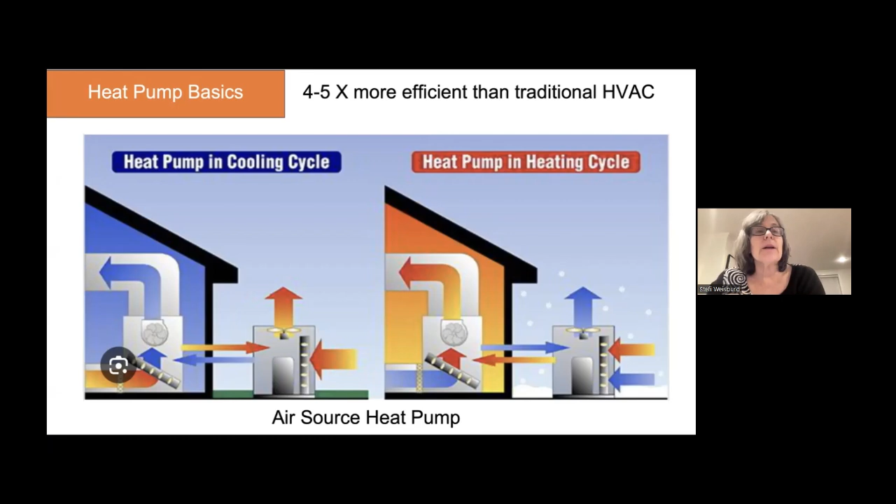The pictures here show what's called an air source heat pump because they're getting the heat from the air, but you can also have a ground source heat pump or even a water source heat pump for where you're collecting the heat to move. If you already have ducts in your house, you probably would get a central unit that will just replace either your AC or your furnace and work through there.

But if you don't have ducts, or if you have a room that needs supplemental heating or cooling, or you're putting on an addition and you don't want to pay to have a gas line in there, mini splits are the way to go. And actually, you can combine them. They're very versatile depending on what your home configuration is. There are also window heat pumps that just plug in to a regular outlet, and those are great for both homeowners and renters. If you haven't experienced living with a heat pump, it's a different sort of philosophy and experience.

So when you have a gas furnace, and typically installers will oversize their gas furnace because they don't want to have to come back to your house if you're complaining about not enough heat. And that furnace will just blast on and off, and you'll know when it's working.

A heat pump is very different. It's a lot more subtle. It's more like a feather. It will make tiny little adjustments to the temperature, and you may not hear it at all.

As I said before, if you can lower your total energy bill, especially if you're on propane or electricity. If you go from gas to heat pumps, your electricity bill went up. That's what happened to us, but our overall energy bill went down.

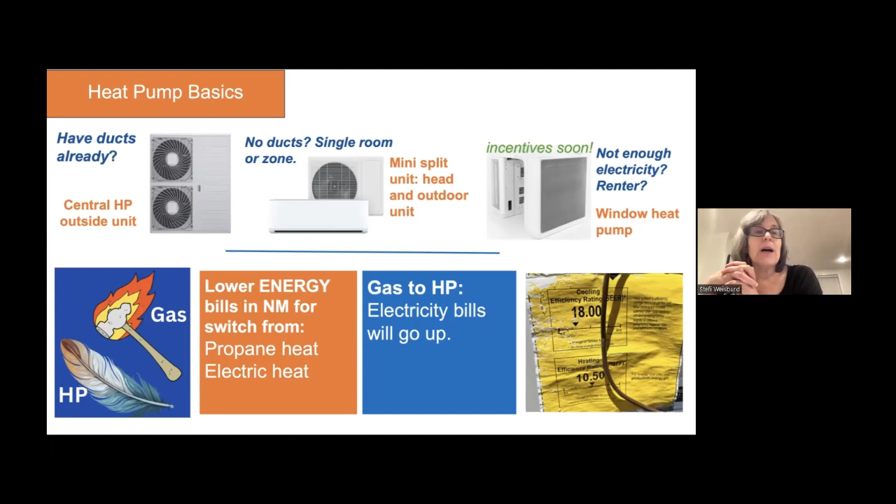When you get a proposal from an installer, you might see these words on it: single stage, two stage, and variable capacity. They essentially reflect the efficiency of the heat pump. The single stage and two stage are the older technology, and they're kind of what gave heat pumps a bad rap to a lot of installers who think heat pumps don't work in cold climates. These were really used a lot in the Southeast.

However, Carl and I were seeing a lot of these installed this summer, coupled with 80% furnaces, which is not very efficient, but he'll discuss that more when he talks about dual fuel. That's when you have a heat pump and some other heat with it, like gas or even electric, but dual fuel we're going to talk about is all gas.

So the last one, the variable capacity, or having inverter technology, this is the newest tech, and there's a whole class of heat pumps called cold climate heat pumps, and Carl is going to tell you about those.

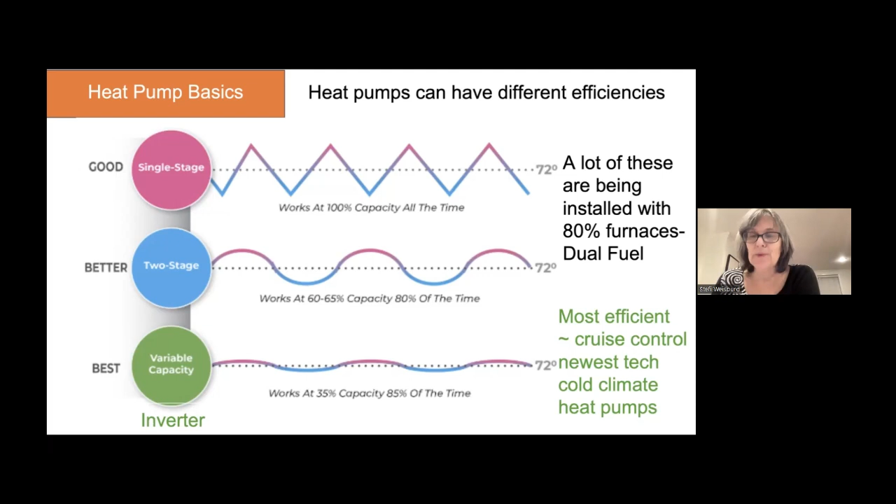Thank you, Steffi. So before I go on about the heat pumps, I just wanted to emphasize a couple other things and highlight some stuff about what you already explained. With heat pumps, you technically are going to feel a range of heat that's more consistent and even, instead of feeling that blast of heat from a gas furnace when it comes on. As Steffi mentioned, you feel it. You can put your hand by the register. They're either on the ceiling or the floorboards, and you can feel it. You can be like, man, that's nice and warm.

With the heat pump, if you decide to go that way, I encourage you not to be disappointed that heat pumps will tend to run a little more frequently, but they're actually using less energy. And what they're doing is maintaining temperature over the duration. Instead of going hot, cold, they kind of run at a consistent temperature. And a lot of homeowners that have received heat pumps think, oh my God, this thing runs 24/7. It's constantly running, but it's running at a very low energy consumption and keeping a steady state of heat.

And it's going to be more lukewarm to the touch. So you won't feel that heat as you put your hand near the vent, but it'll be warm. And trust your thermostat. If your thermostat says 72, 73, whatever you like it at, trust it's going to maintain that temperature. So just wanted to point that out before we go too much further.

But anyway, as Steffi mentioned, cold climate heat pumps are the newest technology, and they're not even that new. They've been in existence for several years already. And you might have heard about heat pumps in general from other people outside of New Mexico. We typically have not had heat pump usage here in New Mexico, in our part of the country, at all in history, because they just have never worked well in this climate. But back east, they've been using heat pumps for a lot of years.

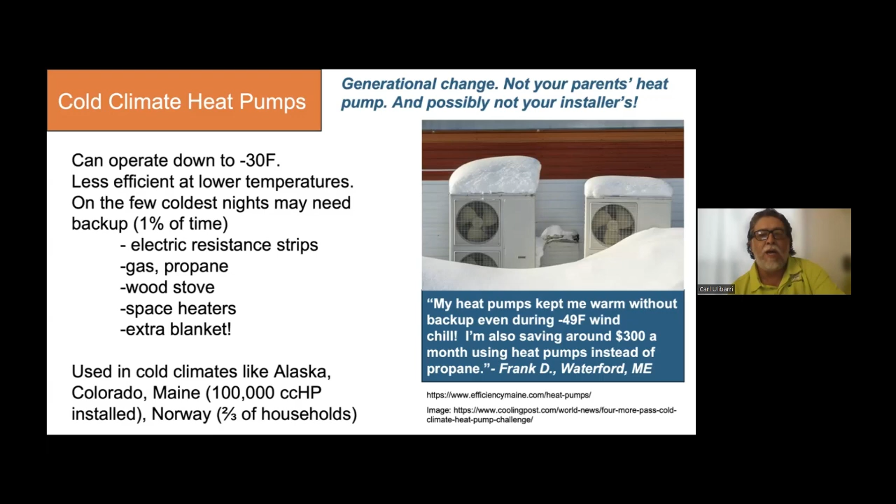Space heaters, wood stove, you can even throw on an extra blanket if it gets that cold for 1 or 2 nights out of the entire year that you would have that scenario. But we have friends in Colorado that are using cold climate heat pumps with no backup heat at all, and they're perfectly comfortable in that climate. So they work, and they're proven technologies. So next slide.

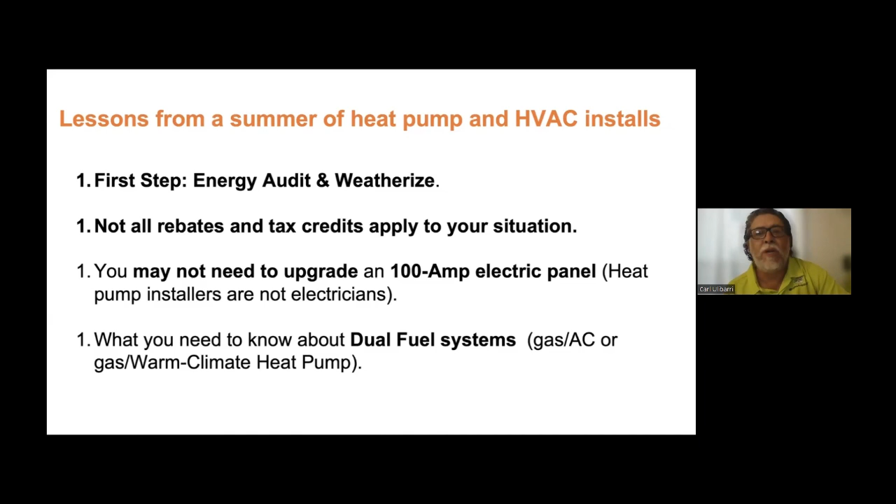That is the preferable step, is you hire somebody to perform an energy audit on your house. And that audit is going to be a comprehensive set of tests on your house that are going to determine where your leakage is coming from, if you could benefit from more insulation, and your electric panel, your fuel systems. It's going to analyze all of the current things that are in your house and make a determination what are the best sources for spending your money the most effective way. Next slide.

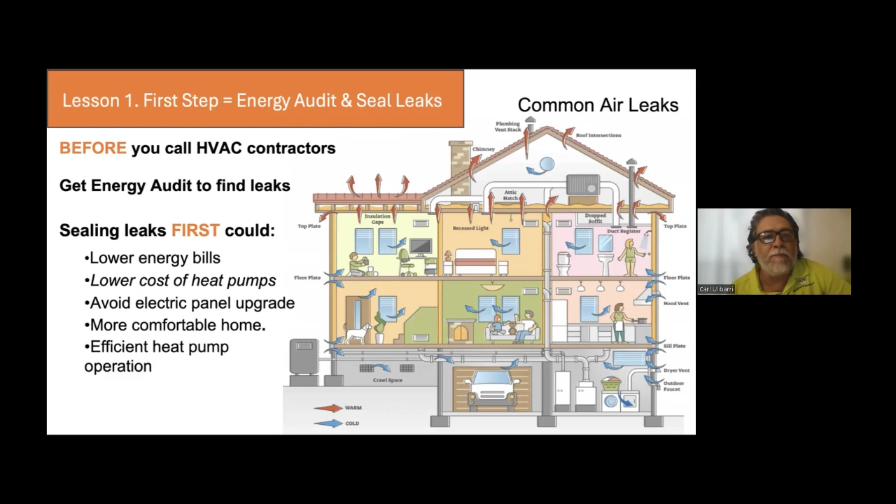So that helps lower your energy bills and lower the size of the heat pump that you would require. It could help lower your need for a panel upgrade if you're not having to put in as big of a heat pump as you might have thought you need but don't actually need. And it'll keep your home more comfortable, keeping the allergens and all of the contaminants from outside from coming in your home. And overall be more comfortable with your state of living.

And it has an electronic device that's calculating the resistance on that fan and determining how much leakage you have in your house. And there's parameters that they go by to make all that determination. And then they can further calculate your leakage. They go around testing the house with a bucket kind of thing, and they can put it around your various vents, your light fixtures and your floor vents. And they can calculate exactly where the leakage is happening just by putting that bucket thing at the various points where they know leakage happens.

They also use a thermal camera, and that thermal camera can determine heat and cool. So they can point it at your walls and your windows and your ceiling, your attic. It can look at all kinds of different places in and around your house and determine where heat or cool is escaping in or out of the house. So they can further pinpoint the areas that need checking up on.

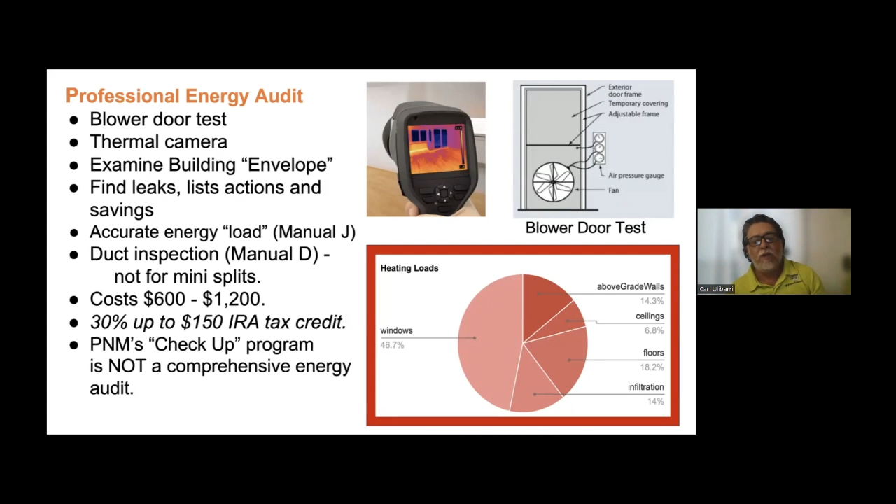So accurate load calculation, that's very important. Steffi and I dealt with some consumers, some homeowners, on some quotes that they're receiving from various contractors. And this one in particular, she had an 1,800 square foot house. The installer claims he did a Manual J and determined that she needed 72,000 BTUs of heat.

Even though her old furnace that was pre-existing in the house was only 70,000 BTUs, and it was probably only a 70% efficient furnace, he was telling her, trying to convince her that she needed a 72,000 BTU gas furnace.

So Steffi and I and her husband used a couple of free software pieces. One of them is called CoolCalc, and we entered what we knew about the house. Steffi and her husband visited the homeowner and gathered some information. And we estimated, based on that software, that she only needed 45,630 BTUs for her home.

So you can see the huge difference in the size of the potential heat pump that he was going to put into her house that was completely unnecessary. And that's even without performing the energy audit. That's just looking at what she had existing in the home, right? Her existing windows and what we knew about the insulation and the structure of the house.

And the recommendation after the potential air sealing measures and window coverings and other items in there, it turns out that she could get by with as little as 34,421 BTUs. So that's taking it down to the very, very nitty gritty, but you can see the huge variance in what contractors are trying to convince customers that they need versus what they truly can get by with.

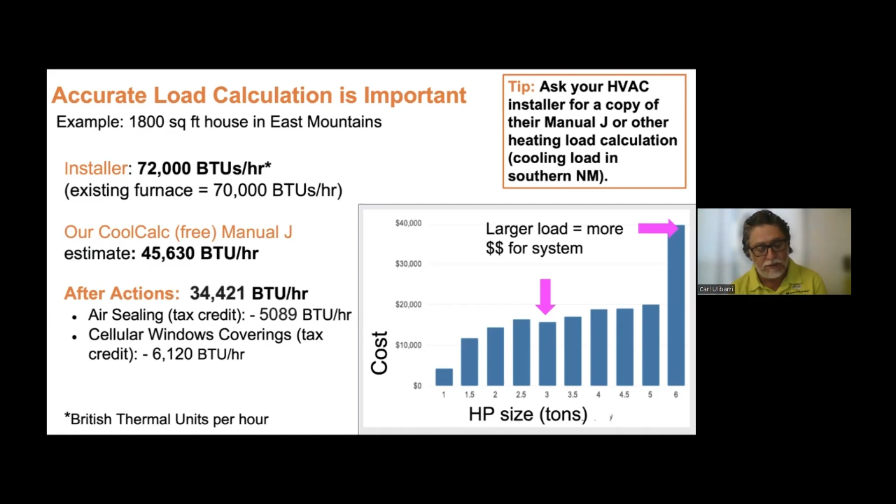So the weatherization examples, there's for tax credits. There's a federal Inflation Reduction Act tax credit where you can get up to $1,200 per year, and that includes window and film treatments. In New Mexico, you can get $1,000 to $2,000 for insulation and $500 to $1,000 per window. I believe that's for replacement windows, correct, Steffi?

Yeah. And then for the rebates, the energy rebates, EPA windows, cool roofs, insulation, and other measures. New Mexico Gas, you can get $1,200 for insulation. PNM will provide $80 per window, and they have some other rebates for other sealing materials that you can get as well. And those are discounts, I think, at the register, like at Home Depot and Lowe's.

And so far, New Mexico, the IRA first stage of the HEAR rebate is up to $1,600 discount on DIY insulation that you can buy directly from the store, and you'll get that instant rebate directly at the counter. You do have to pre-qualify and go to the clean.energy.nm.gov website to determine your eligibility for that, but that can be an instant rebate if you're able to install insulation on your own. Next slide.

So some of the low-hanging fruit, if you're not ready to do those measures just yet, it does take some money to get there. And if you're not there just yet, there are some things that you can do yourself that are relatively inexpensive. One of the key things you can do is LED light bulbs. Those all have rebates that are calculated directly at the register via discounts. And those can save you quite a bit of electricity if you're still using incandescent bulbs.

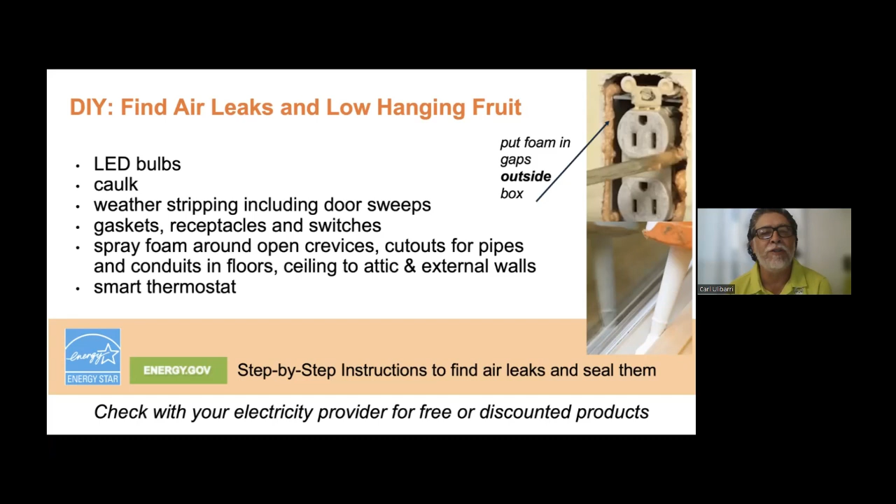So now I'm going to tell you about our second thing we learned. If you want all the incentives, you're going to have to do your due diligence beforehand. There's all these great incentives, but there's a lot of fine print. And whether you qualify may depend on your income, how many people live in your house, where your house is located, whether you pay taxes or not. And then your equipment may or may not be eligible for all these great incentives.

Unfortunately, your installer is not the best source of information for this, and I'll show you in this example that we have. A homeowner called me from Rio Rancho. He called me while his installer was just finishing up and had given him the invoice. And because he pays taxes, he wanted to get the tax credits. And you can see from the invoice, it said dual fuel, most efficient, environmentally friendly, energy efficient home improvement credit 30% up to 2,000. And that's referring to the Inflation Reduction Act tax credit for heat pumps.

He got this installer from PNM's list of trained midstream installers through that program. PNM actually has 2 programs for heat pumps. The other one you get through the checkup program. And he installed a 96% furnace and a heat pump. And so let's look and see what kinds of things he could have gotten. Very convenient, on the invoice they already take out the rebates.

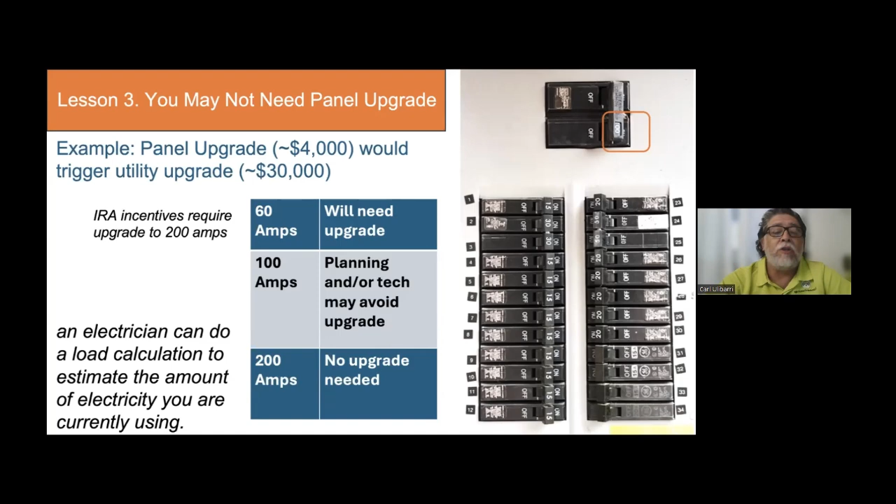If you have a 100 amp main panel, through some planning and working with your electrician, you could probably avoid getting a panel upgrade, and we'll go through that in another slide. And if you have 200 amps, there most likely will not be any upgrades needed unless you fully loaded out your panel, which would be pretty unheard of. So usually if you have a 200 amp panel, going the electrification route would not be a problem at all. And your electrician would be able to calculate any loads for you and make that determination. Next slide.

So is 100 amps enough power? For 99% of the households, it is. Hang on a second.

This comes from a study that Sean Armstrong and a number of people did at Redwood Energy and some other places. Because of the way the electrical rules are, you have to wire for the possibility that you'll have every single appliance on at the same time, and that just doesn't happen. So in reality, even if you have gas and electric or all electric, most all households actually use less than 80 at any one time.

Yep. And there's a process of doing a load calculation to make that determination. There's an official calculator that's put out by NEC, which is National Electric Code, that can make that determination for you. But Steffi is right. You're never using everything all at once. There's a thought by homeowners or inexperienced people that if you total up the load on all of your breakers, like 20 amp, 20 amp, 15 amp, 15 amp, that's going to be your max load. That's not the way it works. There's a complex calculator that makes assumptions on what percentage of the appliance you're going to use at any given time of the day.

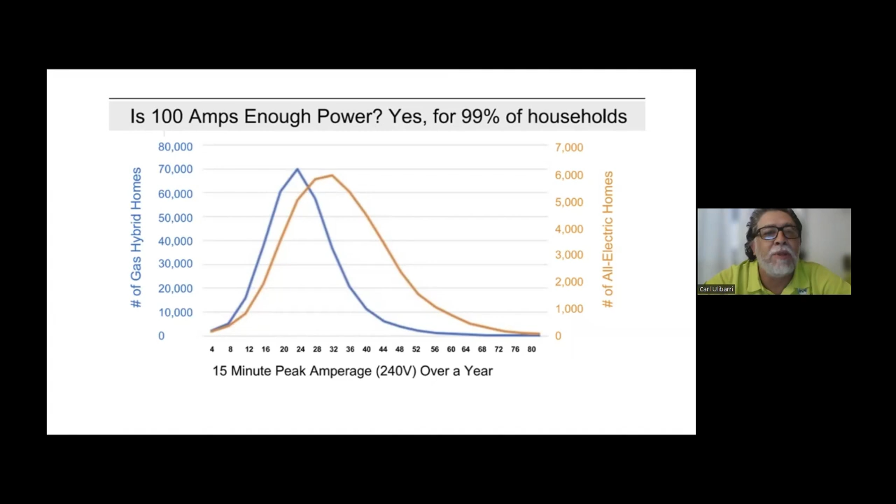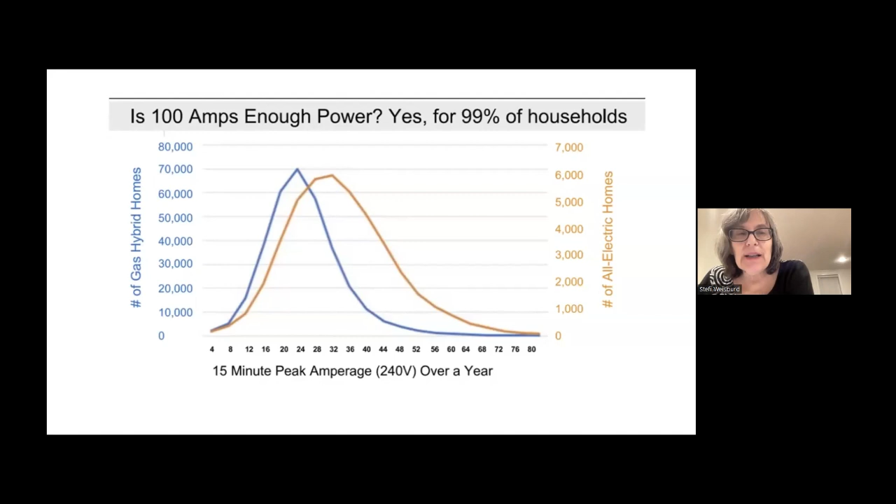Also, another thing I'd like to add about that particular homeowner: because of Carl, we took off the panel and found there were 50 amps that weren't being used, and it wasn't labeled like that. Heat pump installers are not usually electricians, so you might have to get a second opinion. Absolutely, yeah. So a few thoughts on how you can save money.

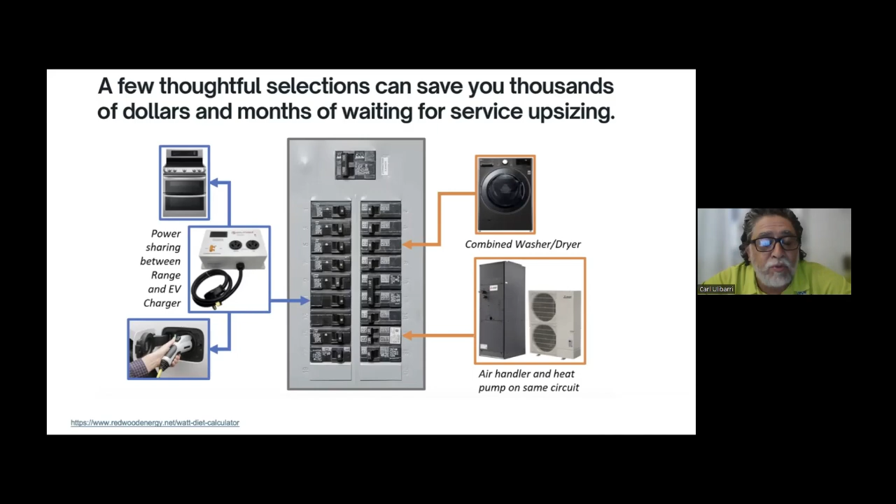And the smart charger will determine which way the power is going to be shared. They're never going to be operational at the same time, but you never dry clothes all day long, and you're never charging your vehicle all day long. So that smart switch is a very inexpensive way to not have to make any major changes to your panel, and you can just plug that in. That picture in the upper left is a smart switch, and the black apparatus to the right is the charger. So that's sharing a dryer plug with an EV charger.

Another item is smart panels. They can be a little more expensive, but if you are having issues with the transmission lines coming to your house and it's just not possible to upgrade, a smart panel can do kind of the same thing as that smart switch. All of the breakers in there are running on technology that can help spread the load to the appliances that need it the most at the specific times that they need it. But that can be very expensive. I believe the rebates, or the tax credits, qualify for some of those upgrades.

Adding a heat pump water heater is a pretty energy efficient upgrade that's very easy to install, and they have 120 volt variants of those heat pump water heaters that will actually run on a regular plug-in circuit that's not even a dedicated circuit. They're that energy efficient that you could just plug and play, and it'll provide the hot water that you need. Still, I advise getting a plumber to do that for you, but it's a very easy way of saving energy. And then you have your 120 volt induction cooktops. Steffi has one of those. I understand she likes it very much. So there are other things you can do.

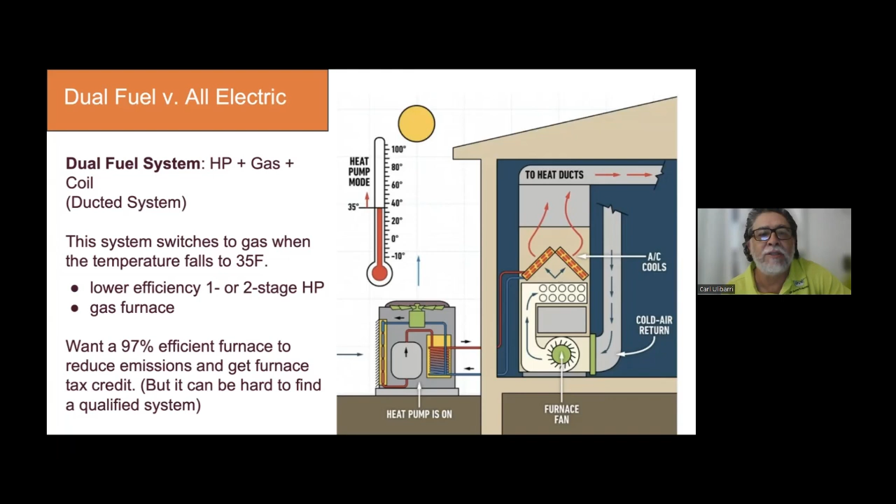Sorry, my internet keeps stopping, and when I click to get back into it, it changes the slide.

Yeah, so a good tip is to ask the contractor, if he's quoting you on a dual fuel system, what temperature is he going to set that supplemental heat at? And if he says 35 degrees, ask him why, and ask him, is this a cold climate heat pump you're quoting me? Because most of the time it's not.

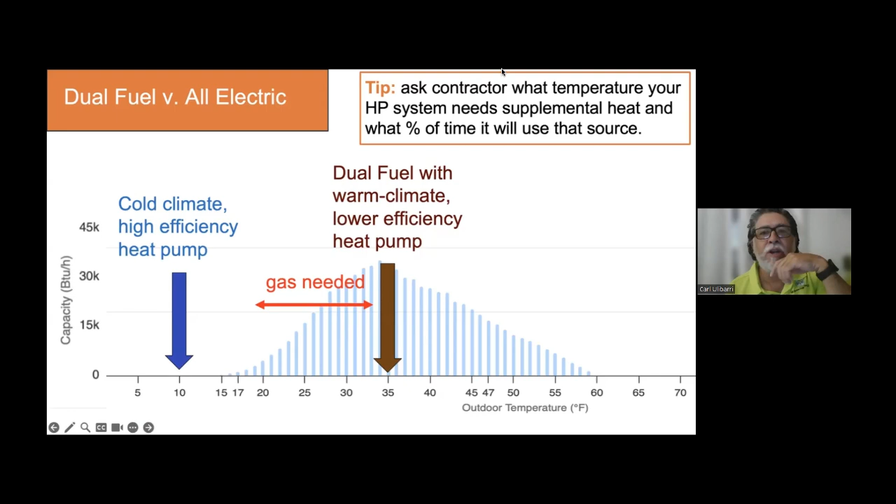So there's not a lot of contractors out there willing or even able to quote cold climate heat pumps. And they're trying to convince the customer, but even a high SEER stage 2 heat pump will still not do what a cold climate heat pump has the ability to do. So ask those questions and make sure they're giving you what you need. Ask for that Manual J, ask for that AHRI certificate, and make sure they're giving you what you're asking for if that's the route you want to go.

So dual fuel, some of the pros: it's more familiar for these contractors, especially in New Mexico. It's what they've done for years. They just do a lot of gas heat. We've always been a gas heat kind of state, and that's what they're familiar with. And they don't like deviating from what they're familiar with for a variety of reasons. It's serviceability, just being familiar with the product.

If you're on propane fuel, you're absolutely going to be at a loss by doing that. If you're comparing electric to natural gas, it's going to be a pretty debatable discussion on where you're going to save energy, but Steffi is a good case in point where you can save money if you do the envelope sealing and the smaller heat pump sizing and all these different measures. It can be beneficial. If you're on propane heat, or if you're currently an all-electric house, you are absolutely going to save money by electrifying and going with the heat pump.

As I mentioned, you're committing to 30 more years of fossil fuels if you go with a dual fuel system. If you're putting in a gas furnace, you've got another 30-year commitment there. So keep that in mind if the climate is a concern for you. You're having more greenhouse gas emissions from your infrastructure. A lot of people want to keep their existing gas furnace and just put in the cold climate heat pump, and that can be okay if you have a relatively new furnace and you don't have the funds or the ability to change that out.

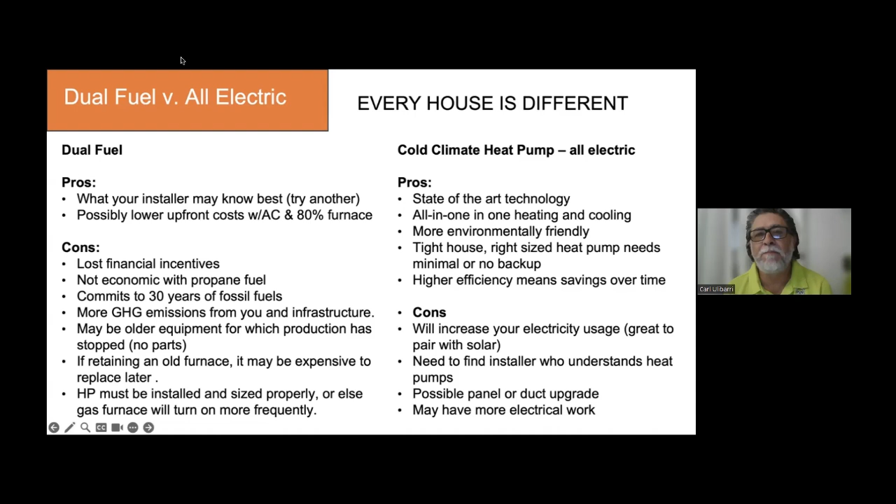So your bonus lesson is electrification takes time, patience, and perseverance. All of the people I was working with were such warriors for sticking in there. I can't believe how long it takes, and it is difficult. So you need to know that first. And like Carl said, and this is from an article in Canary Media, for most contractors, heat pumps take longer for the installers. They have to work harder for it, and they just don't. It's so much easier to just put in gas, so that's what they're doing.

In case you're interested in more information, Electrify Now is a great website. They are having an upcoming webinar on Wednesday, September 25th. And the Ask Sean show is once a month. He talks about some homeowner he's helped, and they explain the decisions that they made for that house.

Also, the Elders Climate Action, they have an Electrify Your Life series, which is really good. And then here are some other great websites that will help you. So this will be in the slides. You can look at it later.

And now we will open for questions, although I think Carl had something to say. And I just wanted to say one more thing. I forgot to say at our house, we have hydronic heat pumps, which actively cool and warm our house through a radiant floor system. So that's another form factor that you might consider.